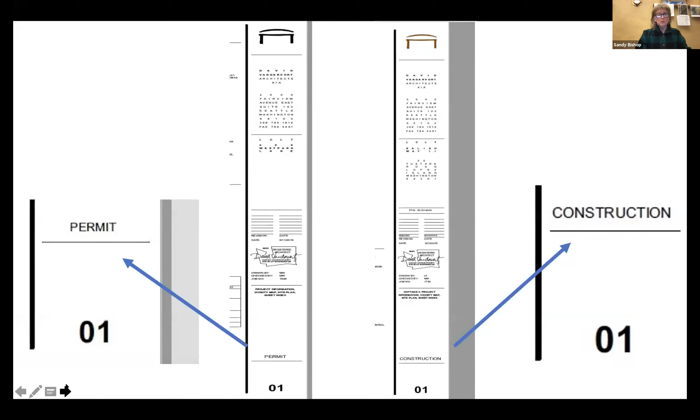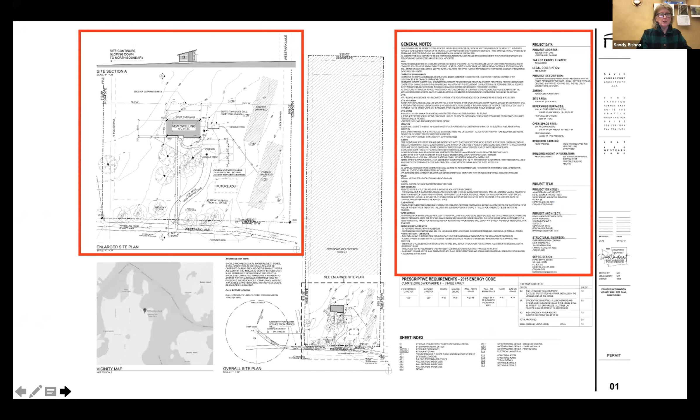So we're on the second page. Here's the general notes here. You can see there's all kinds of good information for you to take in. And while you're building, just keep getting the lay of the land, okay? Because that's important, and mistakes, yes, can be expensive.

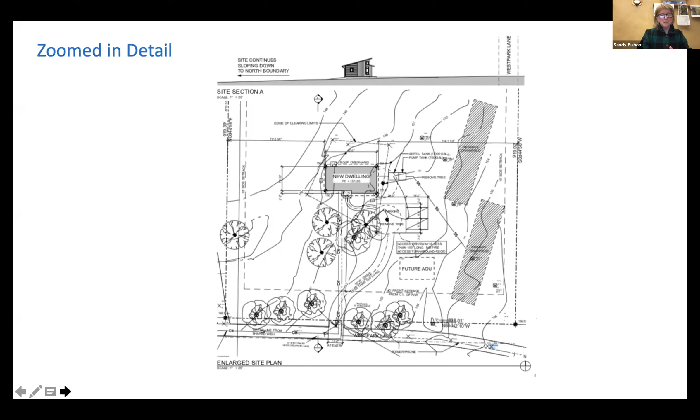This is just a little bit zoomed in. You can start to see what the elevation is. You can see where the dwelling is, where the trees are going to be saved. You start to get an idea of, okay, these are all the contours. So when you get into the foundation, what are you going to be coming up against in terms of contours? And you're starting to build the house and construct everything based on these sets. So you're using your imagination.

You've got the project address. As soon as I get a project address, what's the first thing you do? You go out there, you just start walking around the parcel. I like to always take this parcel number and check it on the county database and make sure it's correct. Sometimes typos happen. You want to make sure you do that kind of thing.

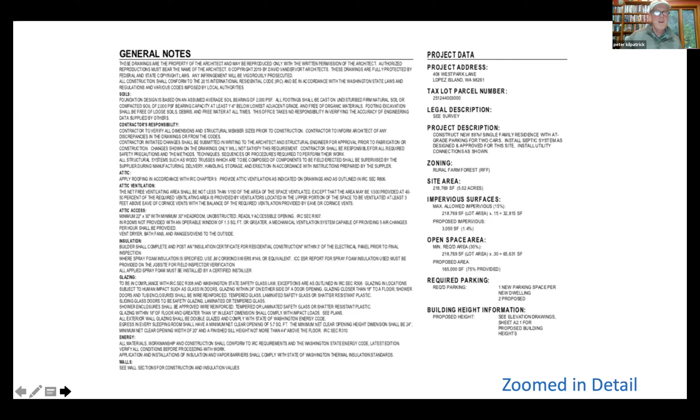Yeah, it's just like a lot of sets of plans that come from an architect. They may or may not be really complete. General notes a lot of times is just kind of boilerplate information cut and pasted from other sets of plans. So it's kind of like a Where's Waldo of looking through notes to find specific information that's just for this project that you really want to pay attention to. So you're kind of wading through the boilerplate to find pertinent information.

Yeah, and once you find it, highlight it. Exactly. Because here you've got a project team, right? So you want to have all of these people, but make sure they're up to date. And I always liked to get a set of plans that had me as the contractor listed as the project team, as opposed to it still being TBD because we're still talking to contractors. So that's kind of a minor thing, but it's always kind of a great thing.

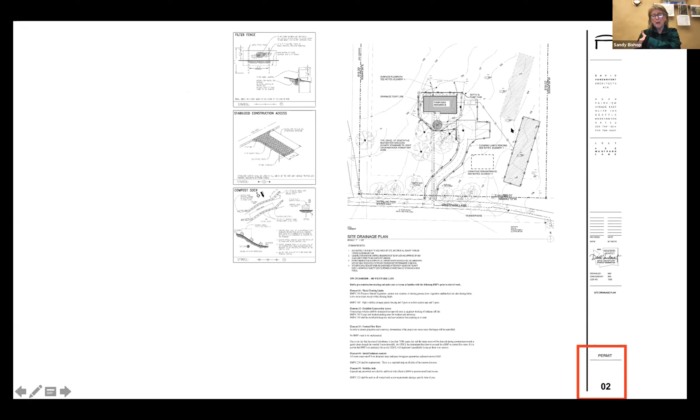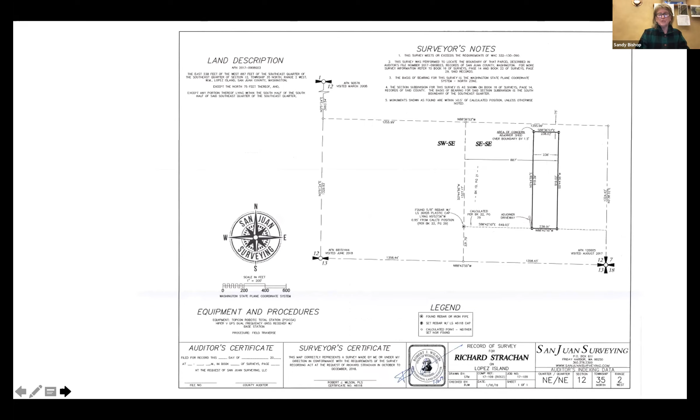So you'll see down here, this is responding. Down in this right-hand corner, those are where all the page numbers are. And you'll notice as we go through the pages, on this page for instance, there are some details right on the page. Oftentimes when you're looking at plans, you will find some notations right on the plans and you go back into the set to look at details. But anyway, as we start going, this is the surveyor has been out, so where to find your corners.

This is just showing you some elevations. These are kind of important to look at. I like to have the surveyors go ahead and give me quite a number of elevations in the area that I'm going to be building, just because I want to know every 10, 20 feet what kind of slope there is. You can get some of that off of Polaris and whatnot, but as long as they're in the field, I just have them go ahead and set some elevations for me periodically.

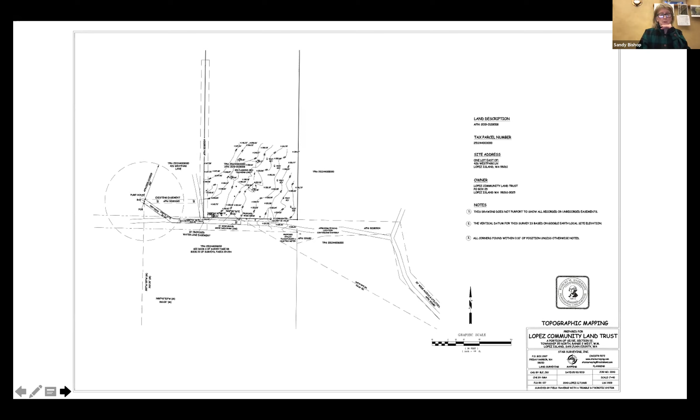Yep, and it's also great at times to have the surveyor show trees, exact location of trees, which they can do as a good reference point to get offsets for staking. So a lot of information that the surveyor can provide on that plan set.

And actually, if you could, Sandy, go back to that. Back to the first page. Yeah, it's just, I was kind of surprised over the years, the times I was reviewing a set of plans with a client and then all of a sudden realized that they really didn't know what they were looking at. Just the whole ability to look at the aerial view of a floor plan and kind of imagine what the spaces are like, being able to use the dimensions to get the size of spaces. Like so many things, it's learning a language that you need to really get comfortable with looking at notes.

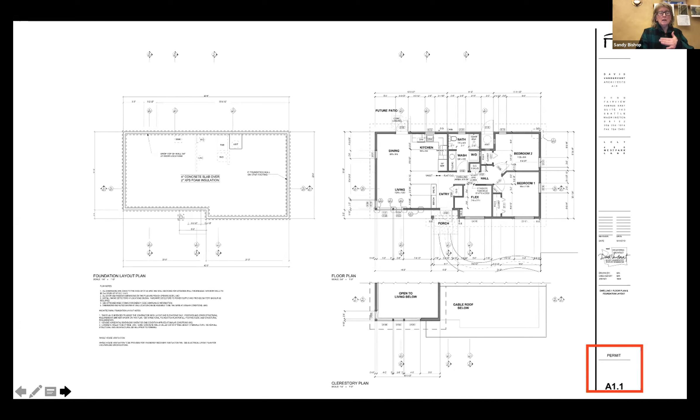And one thing that's really helpful, I think, between you and the client or anyone, is to tell people to go around with the tape measure, take their plans, go around other people's places with the tape measure if they're interested in that kind of a thing, because it really does help when you're building to have people around you understand what's happening. It's helpful for everybody. It makes people less afraid that something is happening.

Now this is A21, so you'll see here, so now we're into the west elevation, the north, the east, and the south. So again, you're getting oriented, and the important part is that you're moving through the architectural set. You've already checked, you've made sure that you're on the permit set, right?

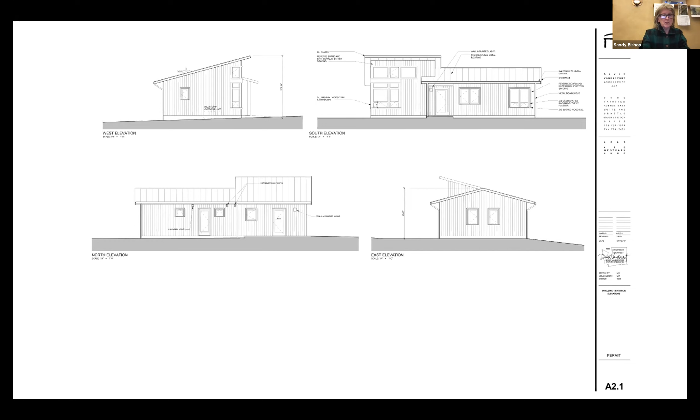You're in the architectural section, you've checked the date, you know you're right there, and now you're looking at these elevations, starting to get a feel for, as the builder or project manager, how you're going to put this together on that particular site.

In this next page, A31, you're looking at sections as though you're cutting right through the house, and you're starting to look at things, as Pete pointed out earlier. See this dotted line, and then it's got this line and a small circle. If we were looking at a regular set of plans, it'd be large enough to see. And what you're going to do is realize that they're calling out some details.

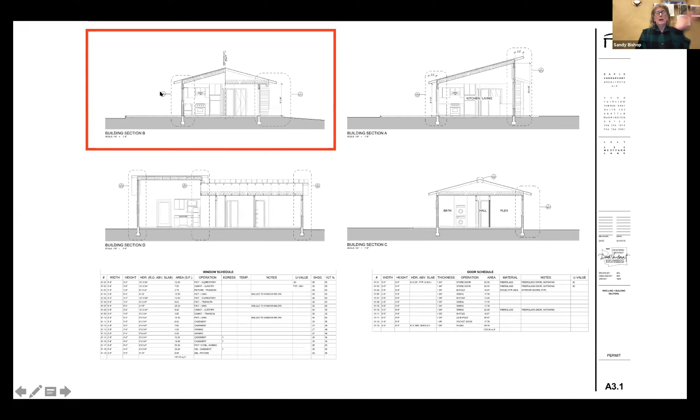Between all of how the foundation and the roof are being tied together. So you will look at that and then later on look at the plans, and you do that all the way through.

So here's this detail, so you have to go to A4.1, and it's your third detail on there. This is your second detail on there. You'll want to pay attention to those.

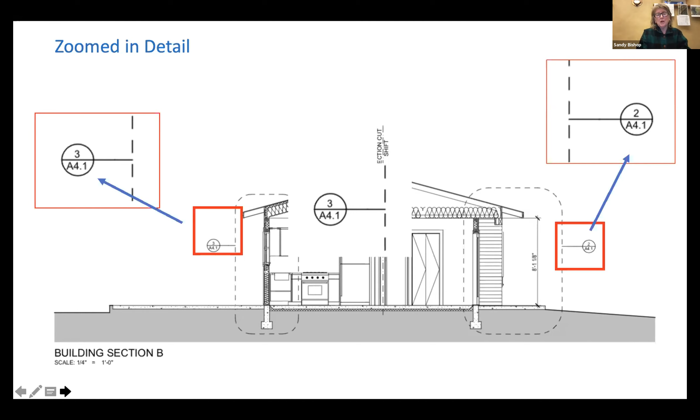It's always good, because if you can build this in your mind before you get too far down the path, you're able to ask the architect some questions before everybody gets onto the site about what they intended in some of these things.

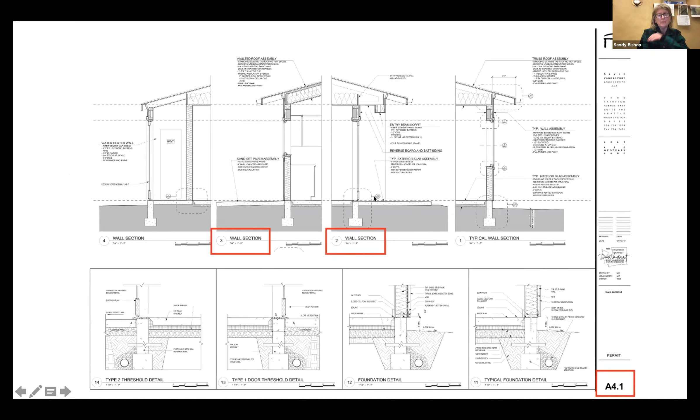So again, now we're here at A41, remember that from the previous page, and we're at this wall section. There's the 3 wall section, there's the 2. And so now you start reading how these details really mean to put this house together. You just follow that same system all the way through your plan reading.

And here it is again, a little bit more zoomed in so you can see these different wall sections. And here there's notes about the soffit. This is the exterior slab assembly, right? That's got another detail right here, and you're going to have to look at that.

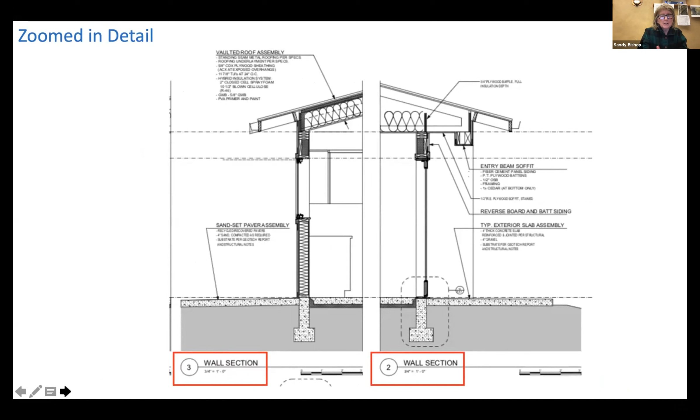And again, once you get used to reading these, you train your eyes. Pete mentioned this is much like a language - you're learning a language, and you're training yourself to see things when you read plans. You're going deeper and deeper into it as you flip through the pages.

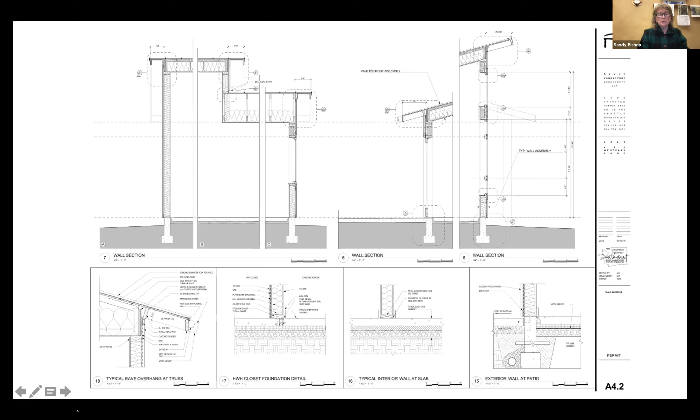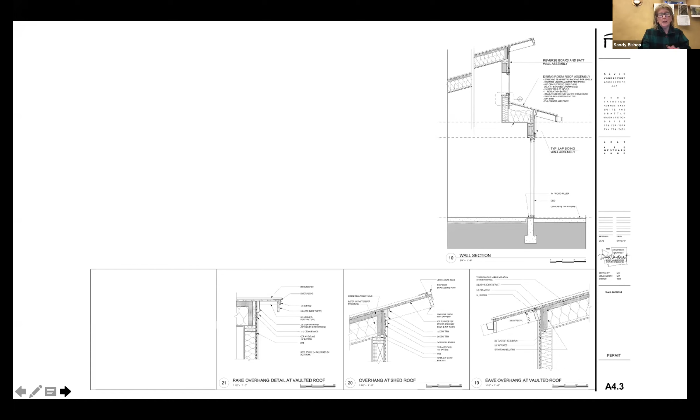We're still at the architectural set, we're at the details. And now you can tell a lot of times these are cut and pasted, just like the general notes are cut and pasted. So be careful with details - sometimes they've lifted it from another project, put it into yours, and it may not quite work out for you. So it's a really good idea as you're going through all the details to make sure that in your mind it all holds together.

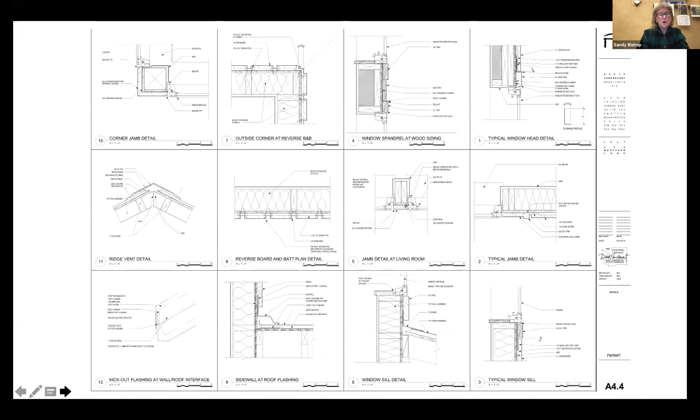And if it doesn't, hey, just call and ask them what they mean. So notice now we are changing from the architectural set, the drawings, and we are going into waterproofing.

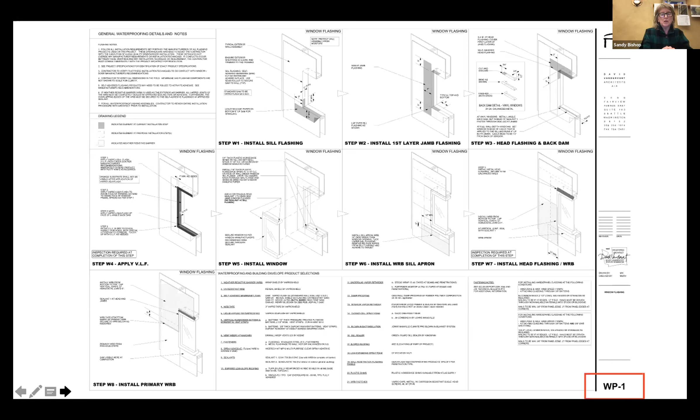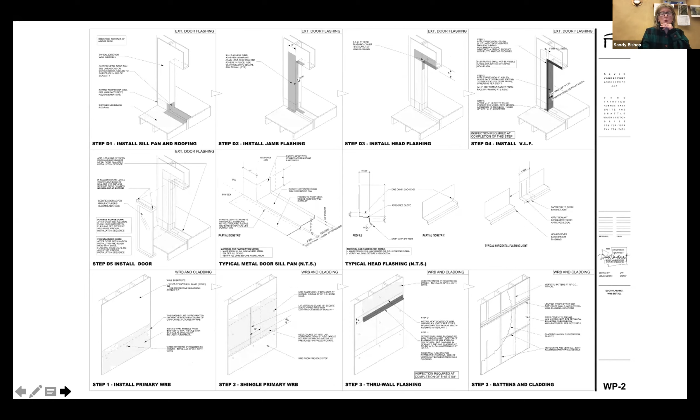Waterproofing in the Northwest has become a very, very big deal. So once you get a system down, waterproofing that is bulletproof for all of your windows, for every place there is a detail - around the sill, how you're going to flash around a window, a door. A lot of people like to mock these up and make sure they get a really good mock-up, and then you send somebody around and they do that same detail on the house each time. But waterproofing, there tends to be a lot of details to it, and you'll want to get familiar with them because water and moisture and vapor is a real big thing in building.

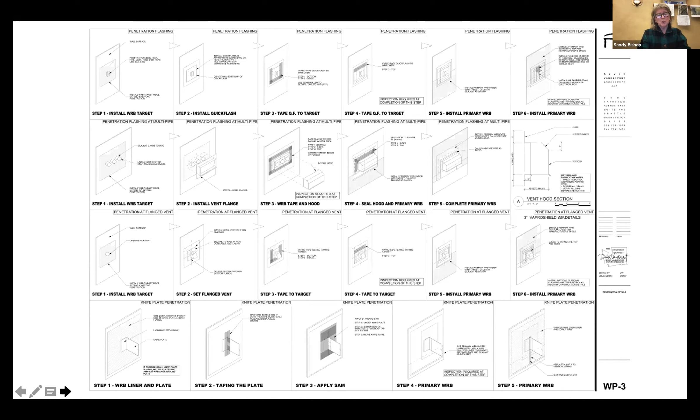And there's lots of product called out, and a lot of times Pete will deal with this a little bit later in the class when you're looking at the specifications book, and you'll sometimes not be able to get what is spec'd, but nonetheless you can get something that's comparable. So now we've left the architectural, and now we're in waterproofing, and now we are into the electric.

And so you'll see here, there is the electric plan, and it corresponds. It's got an electrical schedule, and then it's got a lot of symbols, and there's also the mechanical. So this sheet is important. It's got a lot of information jammed into it, but that's okay.

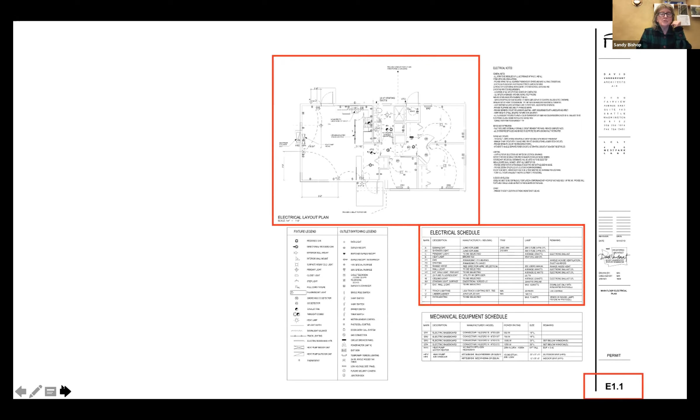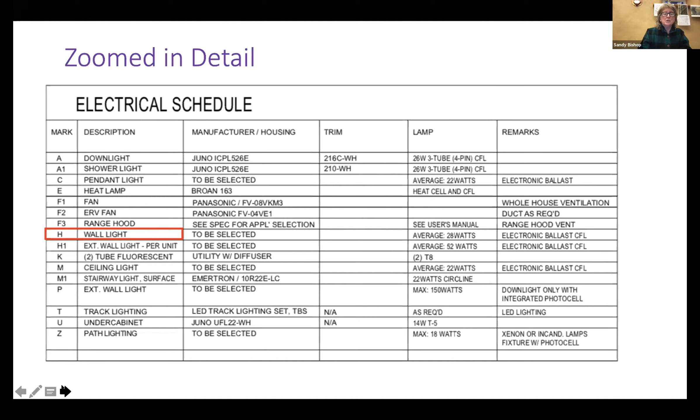You will follow kind of the same set, use your same set of eyes on it, and you start to see there are some details here. For instance, in that electrical schedule that was on the page before, you will see on the plans themselves these, A1, C, however their system works. And here we have highlighted, oh, H is the wall light, and that is located right here.

So you'll just go around, because again, when you're doing your takeoffs, you want to have some idea. You're going to send this plan out probably to a few electricians, but you want to have some idea of what's being called out, because it's helpful for you to know what's happening. And if you're the builder, you want to know if there are wall lights or sconces or ceiling lights, whatever, because it's going to make a difference.

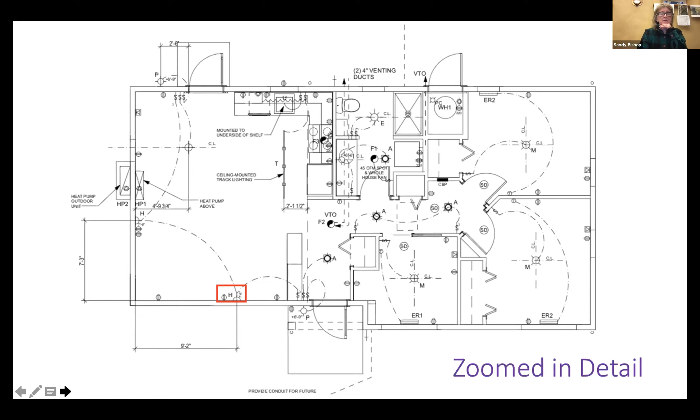So when they call out the concrete, when they call out the wood, all of that, it's pretty much the same. But nonetheless, it's important to read these things and highlight anything that really doesn't fit in San Juan County, and you won't be able to either get a hold of the material, or it'll cost you three times as much to get that. And you'll want to get with the structural engineer and sort that out ahead of time if you can, and get some recommended replacements on that.

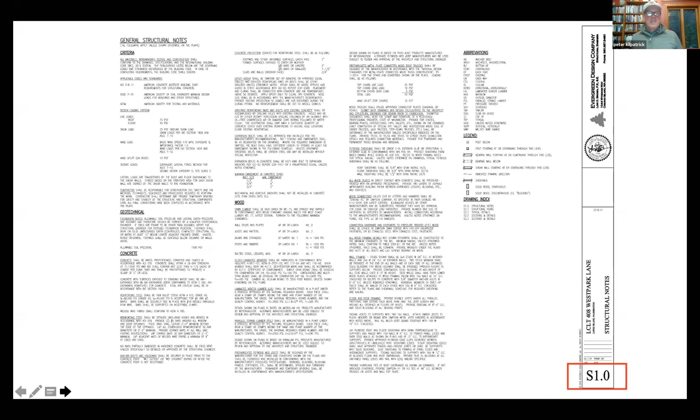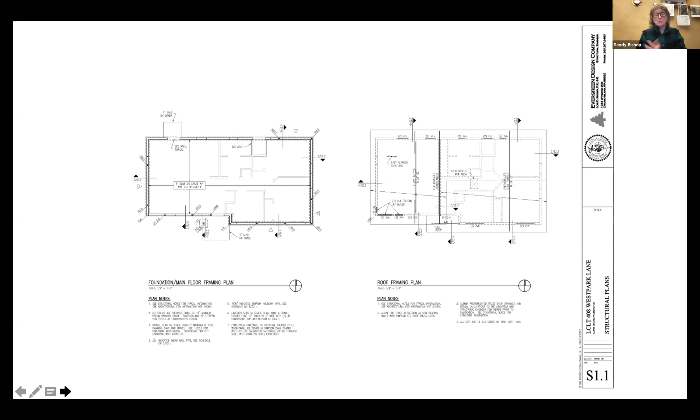That is an excellent point. And that's why when you are reading these, and if you know something as a builder that they may not know as a structural engineer, you call them, you get it in writing, and you work it out together, and then you staple that - don't tape it. You staple it right to the plans, and you have that documentation there that says this note is being changed and it was signed off by the structural, and you have all of your notations. Because even if you agree to something on the phone, get them to write an email documenting it and staple it right to your permit set that is your record set. And you need to make sure that you are following this, because it is a form of gospel.

And so, yeah, now we're into the structural. This is the second page, and you'll see that we're getting into a typical wall framing detail, shear wall framing. What are the hold downs? Especially during this supply chain disruption that we are experiencing, it's really important that you look at all these details. And if there are a lot of Simpson ties called out that you might find a little obscure, make sure that you can either get a hold of them or come up with an alternative and get that nailed down right away in your process.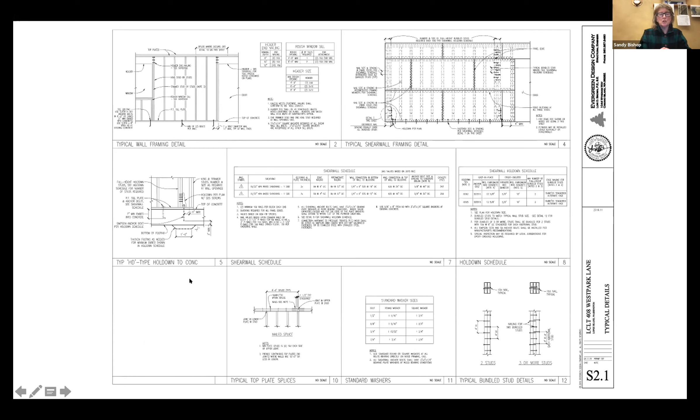Yeah, and look at the shear wall, just know what's happening in the structural. There's lots of details.

And that, my friends, is the end of our session on just a typical residential set of plans. Yeah, and that looked like a pretty good set.

It's amazing the quality of plan sets a project manager or contractor looks at, it runs the gamut from a napkin sketch to... I joked a while ago that I was going to start pricing out projects by how much the plan set weighed, because we were getting plan sets that were just massive. There are so many pages, and that's great, more information is better.

But it's pretty standard to work with plan sets that are lacking information you need to chase down. As a contract document, you don't want a lot of gray area or surprises coming up. The more information on a plan set, to a certain extent, it takes the creativity out of building when there's nothing left to doubt, but it's a lot safer.

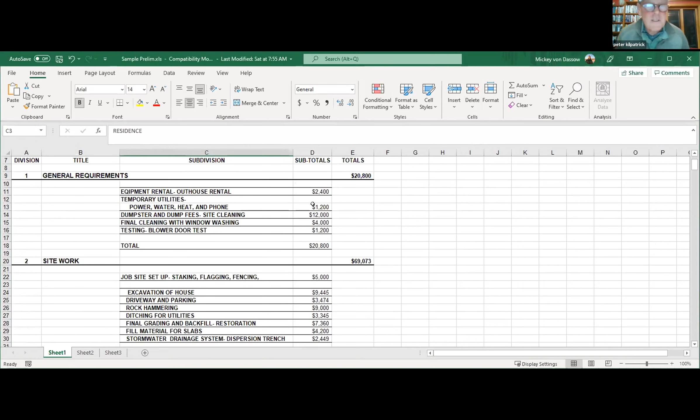And Sandy, if you can just scroll down as we go through it. So again, a disclaimer that this is the way I have always done budget breakdowns. There's a million ways to do it and present it. There are a lot of programs, a lot of software for doing bidding. This breakdown is representative of the way I have always presented a budget breakdown, with the amount of information I provide. This is specific to a project that we finished a couple of years ago, so the prices are actual as of, I think, 2018 or so.

What I want to present now is broken down in the format of a specification book. With a set of plans, a lot of times you'll get a full book of specifications, which is information beyond what's shown in the plan set. It's specific, it's exact - types of wood, exact fasteners, exact everything. But I didn't provide a copy of the spec book because they can be huge, sometimes 100 pages long.